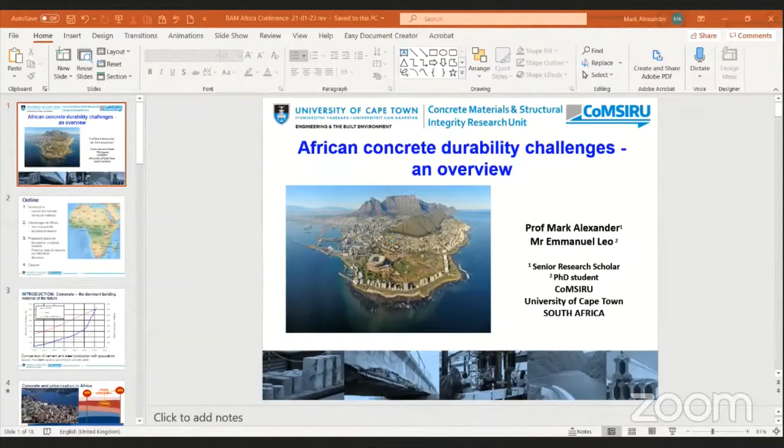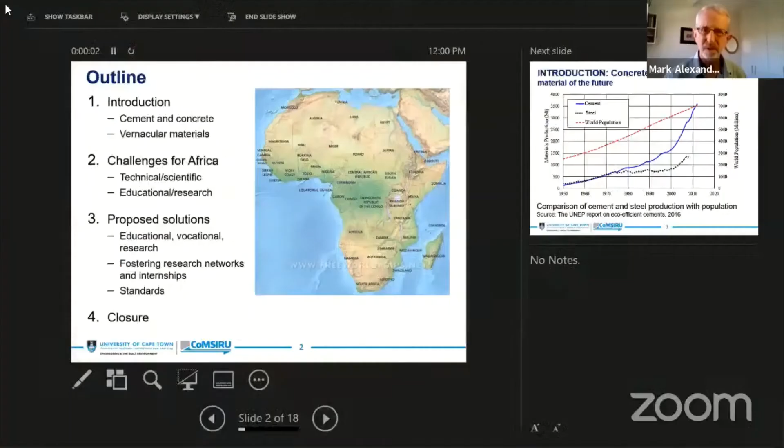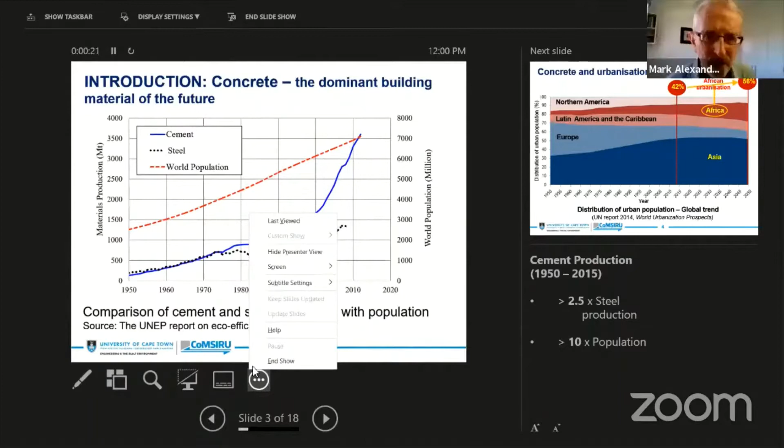Sorry to interrupt, Professor, can you switch to full screen mode, because we can only see the first slide. I am already on slide 3 and I am on full screen. I'm not quite sure, Mark, I think you shared the wrong side of the screen. Are you using two monitors? Maybe you have to switch on presentation mode. Let me see, can you see anything now? No, we see the same as before. Maybe you have to stop sharing and share it again. Okay, I will do that. I have this in front of me now. Well, we see the screen moving. Maybe you can go to full screen mode and we'll see if it changes. How do you see now? Yes, now sharing has started, but please go to stop presenter mode. You see the circle with the three dots below your screen. If you click on that, you'll see hide presenter view. Yeah, if you can click on hide. Yeah, now you're all set. Okay, well I learned something about technology every day, mostly about IT I think. Can you see this well enough now? Yes, we see your slide number 3. Okay, good, thank you, thank you for getting me back on track.

This is a well-known slide, and we can see here the fact that concrete is going to be, and already is, the dominant material of the future. Here we see world population, steel production, and cement production, and it's quite clear that cement production is the material increasing at an exponential rate. The reason is simple: the world population is increasing, the world is urbanizing, and concrete is required to meet the needs of the growing population and growing urban populations throughout the world.

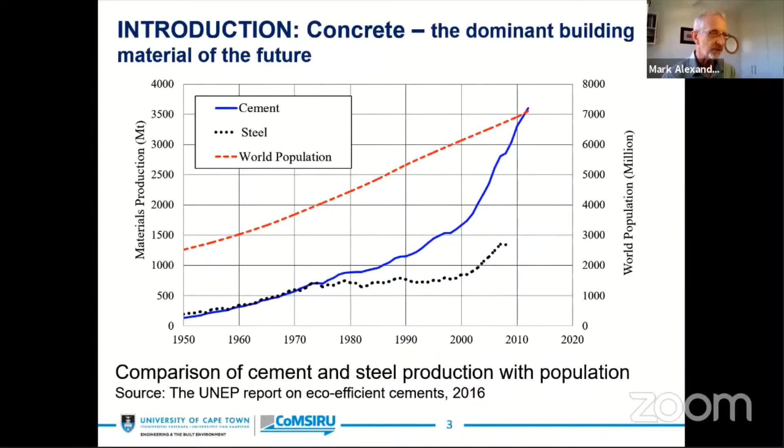This is a further graph which simply illustrates the question of urbanization of the world. If we look at Africa in particular, we see that whereas in 2015 approximately 42% of the continent was urbanized, by 2050 that will rise to 66%. This represents literally hundreds of millions of people who will be moving into the cities, who will require all the amenities in terms of infrastructure, housing, water supply, transportation, and so on that will be expected of these cities.

Here is an example of a more formal city. This is downtown Dar es Salaam, and you can see the level of development within that city, and the amount of concrete that would be used in cities of this nature. Bear in mind that by the middle of this century, Africa will have many of the largest cities in the world within its region.

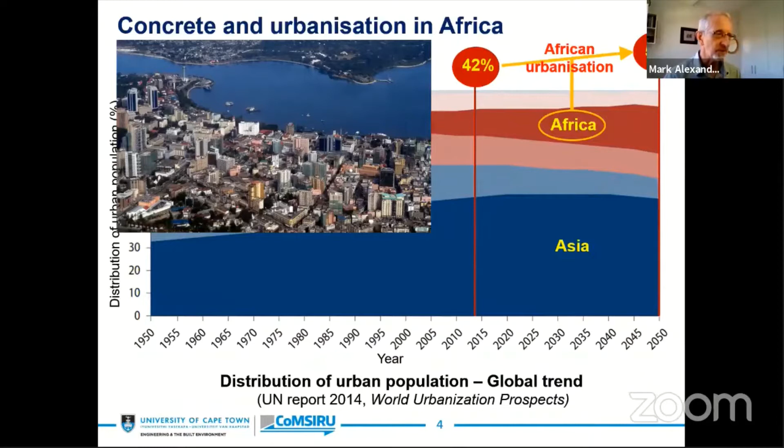If you look here, this is the other side of the urban problem, the so-called informal settlements. Here is an informal settlement in my own city, Cape Town. You can see the iconic Table Mountain in the background, and if you look in the foreground, you see the semi-formal housing, mainly of metal sheeting.

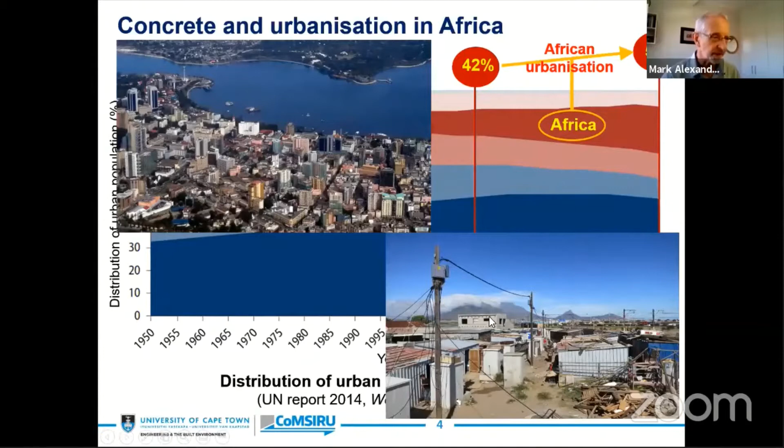But if people want to build permanent structures that they can regard as being for them and their children, look at what they build. There in the middle of the picture, they build a concrete building - a concrete block or concrete brick house. So they turn to this material when they want permanence, when they want durability, when they want to feel as if they've put a stake in the ground and they are going to stay. That is the material that they look for, which is very significant.

And then we've heard the story about Portland cement - in itself it is a high emitter material and a high energy material, but by the time you put it into concrete, of course, that comes down substantially. And so we need to move to this idea of using more blended cements. Manu has given us a very good background on this, where he has pointed out the benefit, but also the difficulties in terms of convincing practitioners and also industry and governments in moving more along this road of blended cements, where we can replace the clinker content by supplementary cementitious materials.

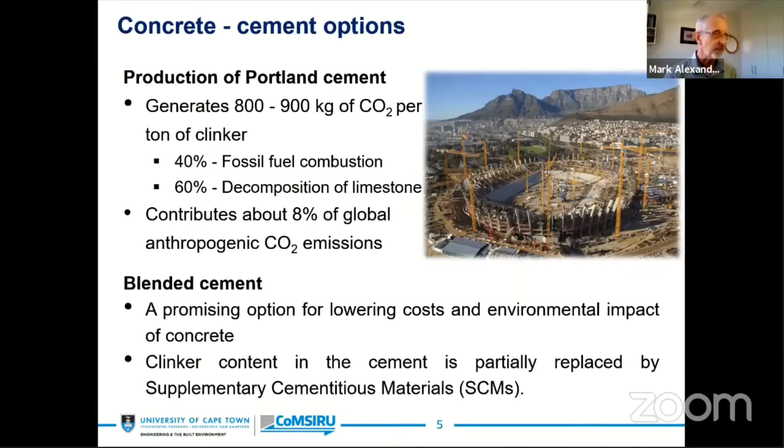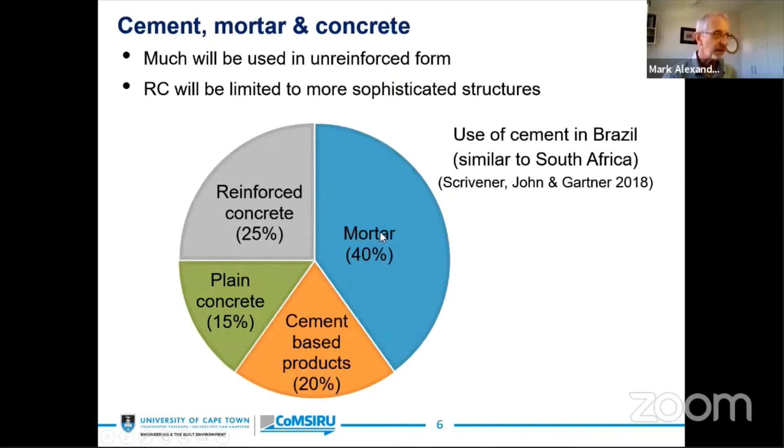So we also have to think about the cement usage in these other applications when we start thinking about improving the sustainability of construction in general. And that is something we must bear in mind.

My statement here is that with this as a background, durability problems in Africa will inevitably mirror those elsewhere around the globe. After all, we're dealing with exactly the same material, maybe slightly different cements, but essentially the same material. We have climates and environments that will have the same effect on these materials, so we're going to have similar problems. But there will definitely be regional focuses dependent on the materials themselves and on the particular climatic situation that would apply in those regions.

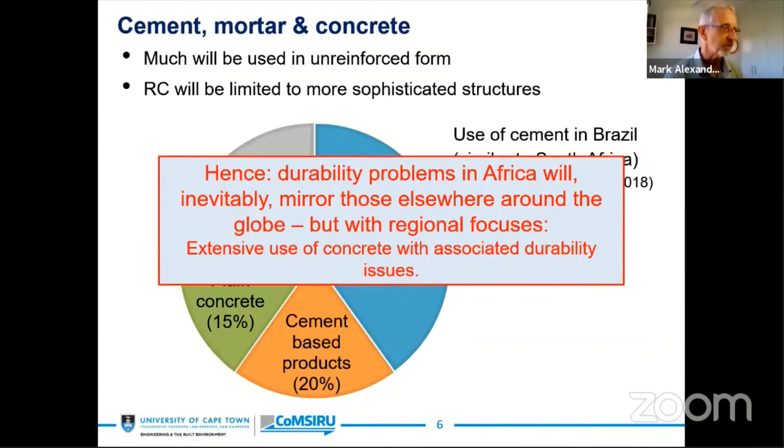We will therefore have extensive use of concrete and concrete-related products with associated durability issues, and these are the things we want to tackle. We should not forget the vernacular materials, though. Here are some very interesting slides of different kinds of vernacular materials around the continent, but mostly based on earth construction. To me, it would be a great pity if we were to lose the skill and knowledge of these materials, because they can make a substantial contribution to the needs of the population in the future.

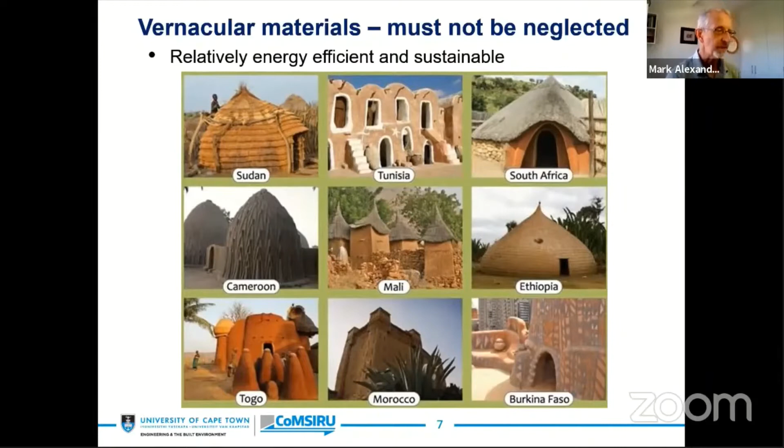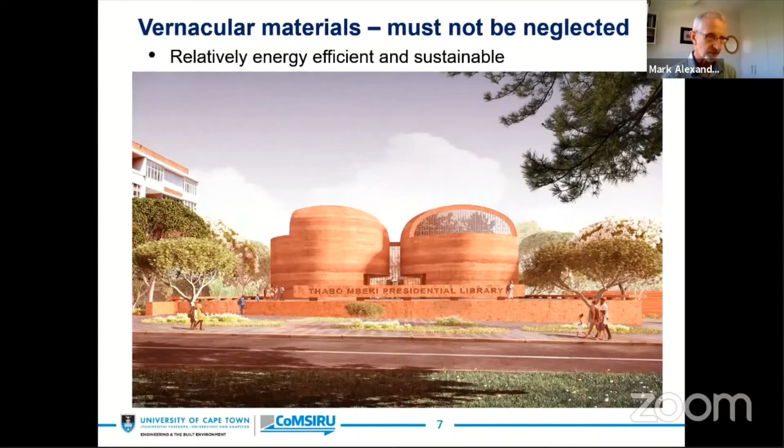Interestingly enough, this is an artist's rendition of a new building about to be built in Johannesburg, the Thabo Mbeki Presidential Library building, which is going to be constructed of earth materials. So here is a return, if you like, to the vernacular in a very large and very iconic building. This, I think, is a very laudable development, because it indicates that we can use these materials even for sophisticated structures going down the road.

Now, what about the durability challenges? As I've said already, talking first about the technical side, the durability problems are not unique. One of our problems, certainly in Africa, is this question of imported solutions to these technical problems. We have inappropriate standards and practices that are often simply imported from other parts of the world and not always suited to conditions here. The reason for this importation is quite simple - it's usually linked to project funding and international contractors.

So an international contractor is given a job, maybe even a funded project in Africa. The government of that contractor will fund the project, and of course, where does the money go? It goes straight back to the funding country. It never even finds much application within the continent.

And we even have situations here where an entire construction crew arrives with the laborers all imported from elsewhere, builds a project, departs, has absolutely no impact on the local transfer of skills or lifting up the local community, and leaves behind a structure that is often inappropriate and now has to be paid for to the host or to the funder. And that just ties the whole situation up in a debt spiral. That is certainly something that we should avoid.

We do, of course, have the issue of the lack of technical and scientific knowledge. Not always and not in every case, but broadly across the continent, we have a lot of work to do here in improving our technical and scientific knowledge and expertise going into the future.

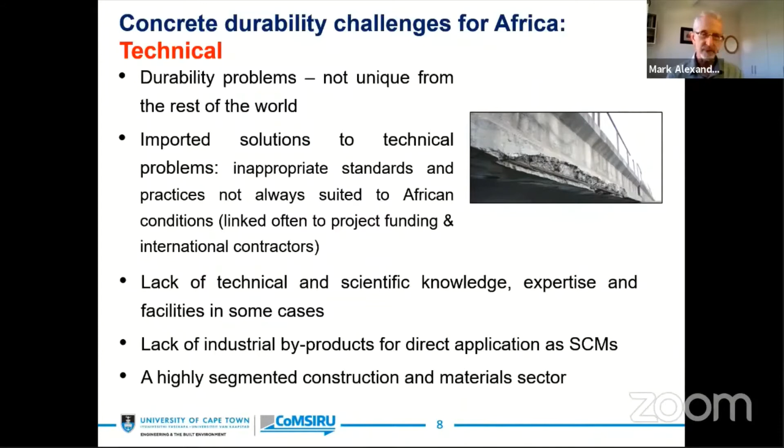As far as the technical durability challenges, these will be much the same as elsewhere. One of the big ones is alkali-silica reaction. We have major issues not only in South Africa, but particularly in Cape Town on this issue. Charlwood, for example, has documented AAR problems in at least 9 African countries with a substantial number of water retaining structures.

Here's an example of the Owen Falls or the Nalubaale Dam in Uganda on the White Nile, which has substantial ASR problems and has had for the last 40 or 50 years the dam has been there. However, it has continued to function, but of course it has led to problems in having to continually reseat the machinery and make sure things are running properly.

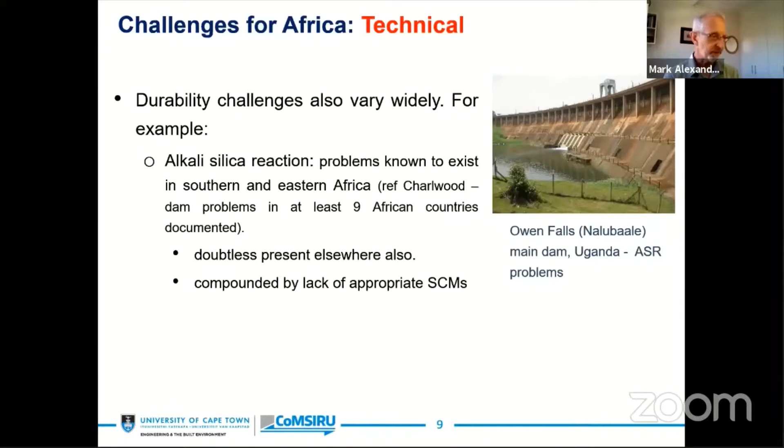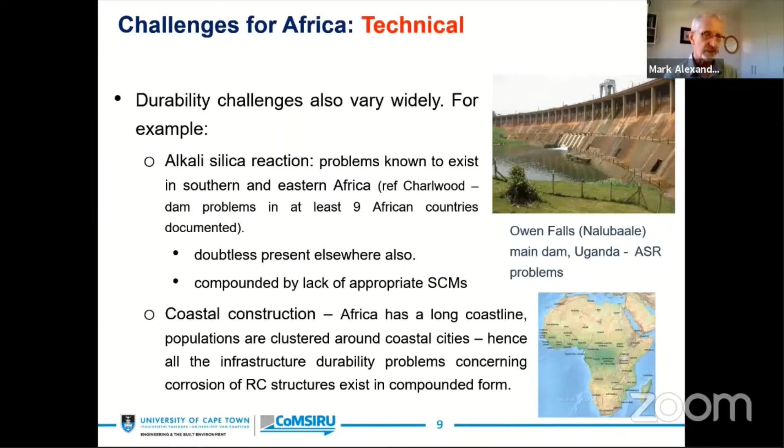There will be problems elsewhere, and this is compounded by a lack of appropriate SCMs, as I mentioned. Then also, coastal construction - Africa has a very long coastline. Populations are clustered around the coastal cities, and so all the infrastructure durability problems concerning those issues will exist in compounded form, and that has already been referred to very well by Manu.

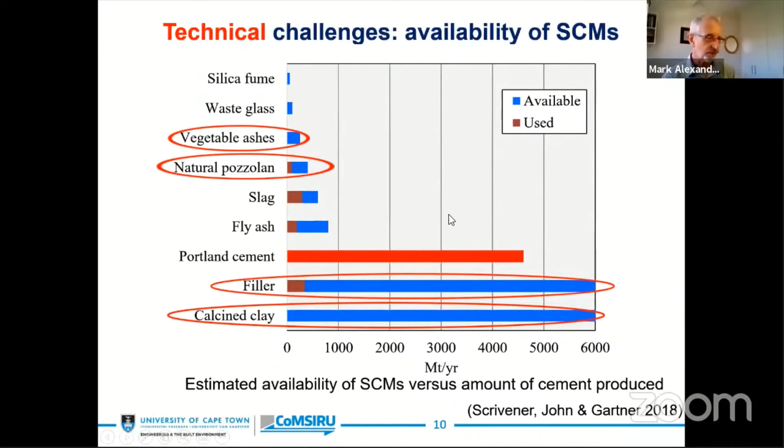Slag and fly ash are not easily available in Africa. As it turns out, in South Africa we have a reasonable supply of these materials, but this is not true throughout the rest of the continent. So major opportunities exist in research and application for African-derived SCMs.

Then the challenges to me are much more around the educational aspects. The technical challenges usually we can solve, but it's how to educate, how to train, how to produce adequate facilities and make these available, expertise and experience. This is, to me, the largest challenge. Well, a little bit tongue-in-cheek, I suppose, we could just go and read this textbook that I produced, but as I said, that's very tongue-in-cheek.

It's unlikely that Africa will move strongly into remote robotic construction in the near future. But I think that digitalization, for example BIM, can assist in ensuring better standards of workmanship, and we're already beginning to see that, and to create a better integrated value chain in construction. But again, we cannot generalize for all of Africa in this regard.

So let's think about some of the solutions. Well, the solutions really come back to this question again of education, training, and support. We need appropriate curricula and course materials for educating the next generation of African scientists. There's a paper here by Wolfram Schmidt and his co-authors which you could have a look at in CCR, and that certainly lays out some very interesting ideas about education for the African situation in particular.

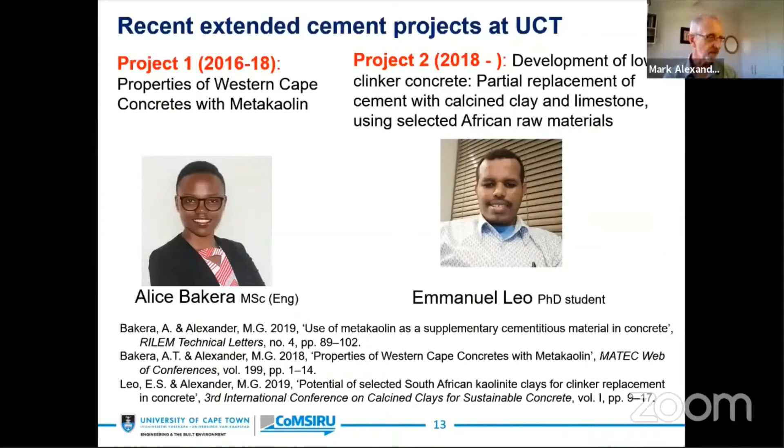Just as a matter of interest, we have been working on SCMs, other types of SCMs at the University of Cape Town. We've had a project by Alice Bakera on use of metakaolin in Western Cape concretes, and a current project by Emmanuel Leo, co-author of this presentation, looking at the development of low clinker concretes and partial replacement of cement with calcined clay and limestone using selected African raw materials. He's looking at clays from East Africa and South Africa, and already producing some very interesting results. So we are doing some work on this, but it needs to be expanded very substantially.

I think here really the important issue is the extrinsic factors: the role of mentors and promoters, institutional support by the institutions themselves, as well as funding. I think we haven't really exploited the possibility of industrial funding properly. There has to be industrial funding available in my view, and we haven't seen that coming through adequately at this stage, but that will be very necessary to allow these networks to flourish. So that's the point I want to simply put on the table and see how we can develop that further.

I also have to acknowledge that Wolfram has done tremendous work here in bringing together African scholars. I often say of Wolfram, he's a more enthusiastic African than I am, and I really mean that. He's a great tonic to us here and a great help. So for fostering research networks in Africa, Rilem, I think, is a very convenient vehicle and should be much more exploited in that regard.

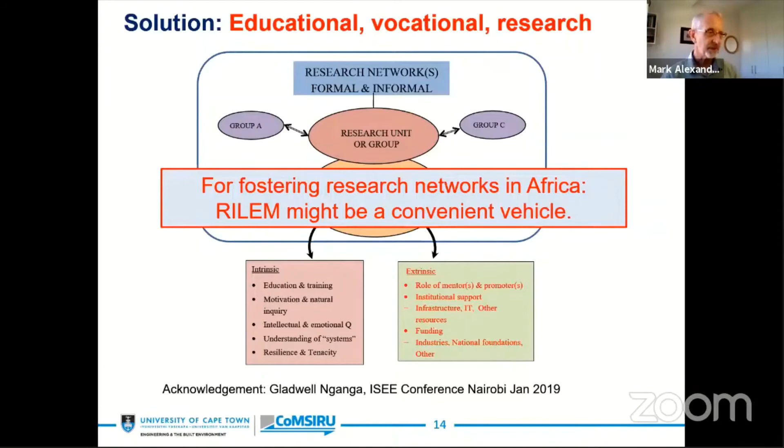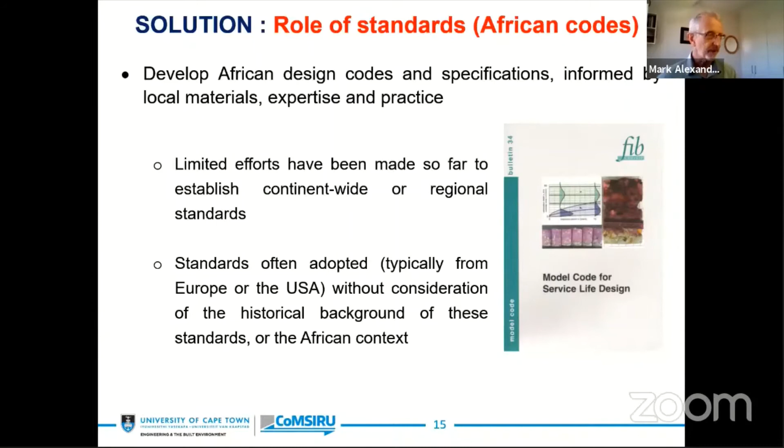And then the question of standards. We really do need to develop African design codes. Limited efforts have been made so far. There was an African Design Code Committee put together 10 or 15 years ago, but it never got too far down the road. There's this problem that often standards are simply adopted from abroad without consideration of historical background. We do need to develop local standards here that are applicable to our own conditions. That doesn't mean that in many cases these other codes and standards cannot be used, but certainly they would need to be adapted or developed or modified in some way.

Then let me put this on the table as well. I think that if we can expand the opportunities for international internships and then allow these young people who have been in international internships to come back into the African context and apply that knowledge, that would be an ongoing boost to the need for developing African solutions. EPFL have got these internships, BAM does a great job in providing these. Of course, they're limited in number, but maybe these could be expanded as well.

So let me bring this presentation to a close. Just again to say that cement and concrete will remain the dominant material in the future for meeting Africa's urbanization and built infrastructure needs. We can see that, but it's not necessarily the cement and concrete that we're using today. We need to develop these materials, use African developed and derived supplementary materials, and change the nature of the material locally as well.

We should not forget vernacular materials. I still think there's great potential there. The durability challenges in regard to concrete are not going to be different from elsewhere, but with fewer technical resources to meet those challenges, this will largely be the issues we face. Advanced testing and analytical facilities, for example, may be a major issue.

So I see the main challenges not as technical, but as educational, vocational, and in the research area, and that's where we need to be putting our attention. The proposed solutions here are to look at appropriate curricula, appropriate vocational training, fostering research networks and internships, looking at the question of standards, and international internships.

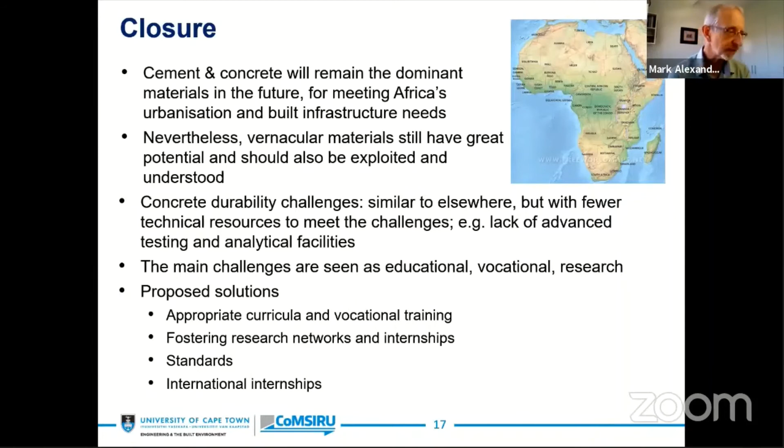Thank you very much, Mark, for keeping excellently the time, which gives us a little bit of time, although we started with a bit of delay, to raise a few questions. I've observed the chat with excitement, both in the small Zoom conference and in the larger YouTube live stream, and I can summarize a few things I read from these messages, many of them related to lack of standards and also to the communication to different players in the field, from the young ones to the very old ones to the established ones, and what their roles are. So obviously there seems to be a gap in the communication between the different players in the field.

You've been inspiring a lot of young researchers, generations of researchers. Maybe some of them have been a professor for a while already in the meantime. Everybody really, I mean what can I say, you are kind of a legend in Africa and in the academic area. But what are the steps that need to be taken to bring this into practice, to those people who create the standards, to those people who make policies, to those people who are the practitioners at the end of the day?

Could you elaborate on that? What would be required? Yeah, well that is a very tricky question, because Africa is such a diverse continent. We do now have exciting developments. The African Union is beginning to flex its muscles and become, I think, a far more effective body. We have now, just in the last month, had the establishment of the largest free trade area in the world through the African Free Trade Agreement, signed by every African state except one. So I think this is a developing field.